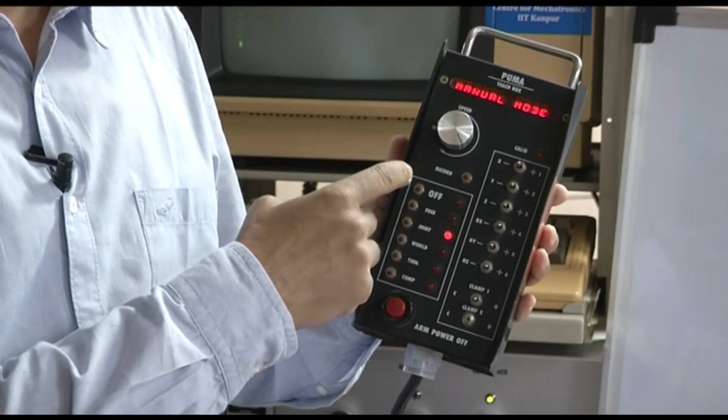The first joint of the robot is what is called the waist. This is the teach pendant by which we can move the robot and also program it. It has joints 1, 2, 3, 4, 5, 6, with toggle keys plus minus, plus minus. If I move any of the toggle keys, the robot is going to move.

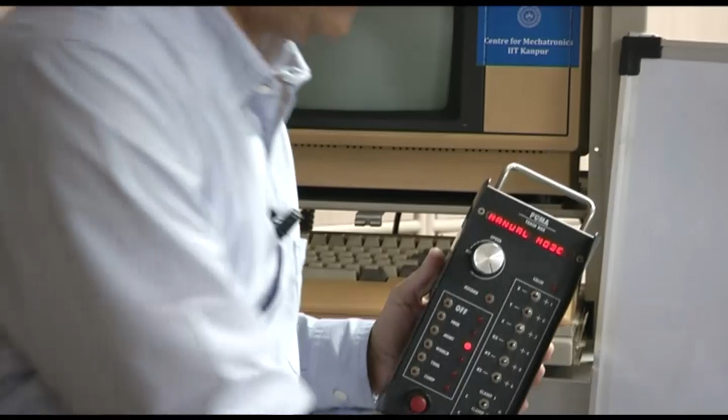The first joint of the robot is the waist axis, which is similar to our waist. When I move my hand, we move across the waist. This is my waist axis, and my hand moves like this. This is my z axis about which I am rotating.

The second axis is this one, which is called the shoulder. When my hand goes up and down is the shoulder axis. The third axis is the elbow axis, which is like this, which is called the elbow. And then at the wrist we have the roll axis, the pitch axis, and the yaw axis.

So we have 6 degrees of freedom, and similar to this we have exactly 6 degrees of freedom on the robot. The first axis is called the waist axis, which is similar to the human waist, and the direction of the axis is vertical, as you can see there.

The second axis, let me turn it this side. So this is my waist. The second axis is the shoulder. In the shoulder axis, the hand can move up and the hand can move down. So this is called the shoulder axis, moving the hand up and down.

The third axis, which is similar to our hand, is called the elbow axis, and this is my elbow axis, which is moving the arm up and down. The fourth axis is called the roll axis, which is rotating the wrist at the wrist. So this is called the roll.

The fifth axis is the pitch axis, which is putting up and down the end effector. So this is my pitch axis, and the sixth axis is the yaw axis, which in this case is looking as a roll about the z axis.

So the last 3 axes - the fourth axis which is the roll axis, the pitch axis, and the yaw axis - they are intersecting at a point, and this is required for having an inverse kinematic solution. So we can program this robot by using the teach pendant shown here, or we can write a program.

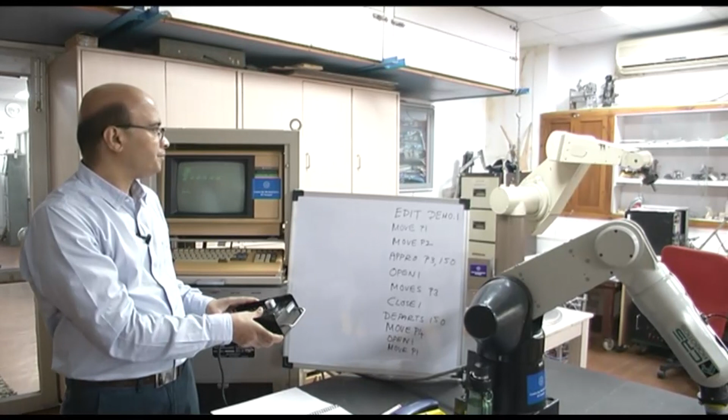So what we will do today is write a very simple program for this robot. Suppose the robot is in one end. Let us move the robot to one side, and say that this is my point P1. So what I am doing is, suppose there is an object on this table.

Suppose I want to pick up this object on the table, and this is the robot - if you can imagine the robot to be same as my hand. So I say that my hand is here and this point is P1. This is equivalent to the point P1 there.

So then if I want to pick this up, from P1 I will come to point P2, which is very near or just on top of the object. Then this is my P3 point. I will go down and catch this object, take it up to P2, take it to P4, some other point, and then drop it and come.

We are going to write a very simple program. The hand starts at a point P1, then comes to point P2, then from P2 it will open the gripper, go down, approach the object and keep a distance of 150 from it. Then it will go down and catch the object, and after catching it, it will depart, coming back up to P2, then go to point P4 and drop the object, then come back to P1.

So the program would essentially mean coming from P1 to P2, opening the gripper, going to P3, coming back to P2, going to P4, opening the gripper, and then going back to P1.

I will draw the sequence here. So we are at a point P1. The robot is at point P1 now, and there is some object here which I want to catch, kept on a table. This is my point P3.

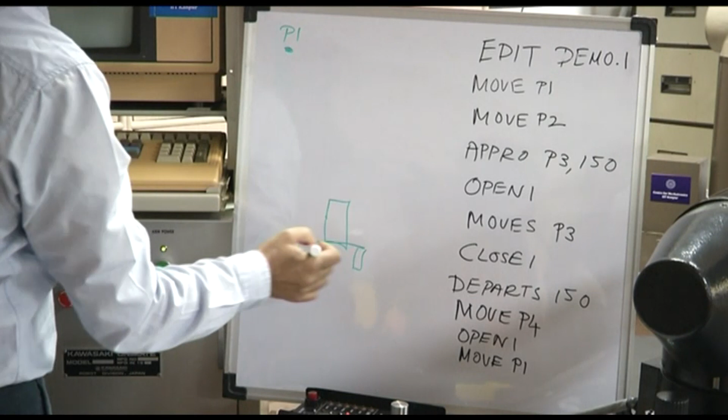So the program we will write would be that from point P1 it will come to point P2. Then it will open the gripper, go down, and wait at a point which is just about 150 on top of P3. Then it will come to P3, close the gripper, and go upward again to P2. Then from P2 it will go to P4, some other point, open the gripper, drop the part, and then go back to P1.

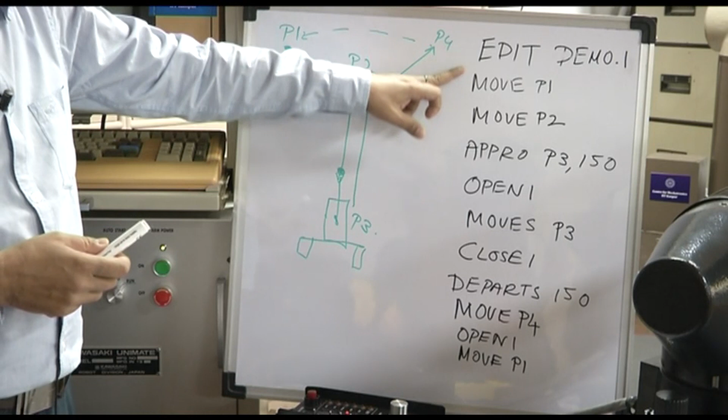So this is the sequence for which I am going to write the program using VAL language. Point P1, it will go to point P2. You can look at the program here which I have written. First is edit demo.1, meaning the name of the program is demo.1. That's the name of the program.

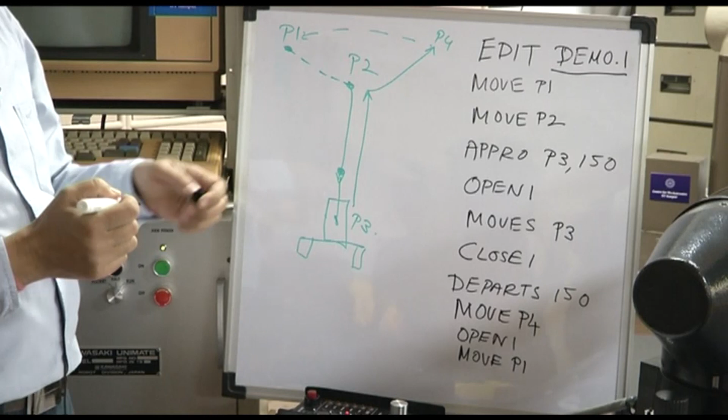Then move P1 - the robot could be somewhere else, so before it starts the operation, it should move to point P1. So the first line is move P1, which is the point we have to define. Next it moves to point P2.

Then it has to approach the point P3. As we saw studying VAL language, we don't directly go to P3, but come somewhere on top of it and wait there using the approach command, which ensures it will stand at a distance of 150 on top of the object.

Then we open the gripper, which is open I. After opening the gripper, it will go down to P3 - note this is 'move' and this one is 'moves', so it will move in a straight line to point P3.

Then it will close the gripper, and depart, meaning it goes straight up by a distance of 150. Then it moves to P4 - this is my point P4, and this is the point where it departs from, and then it goes to P4.

After going to P4 with move P4, it opens the gripper, drops the part, and then comes back to point P1. We can keep repeating the cycle a number of times.

The basic program consists of move commands, meaning move to this point. Then approach - when catching an object, we don't go exactly to it, but come somewhere on top and wait, open the gripper, then go down straight. This ensures the catch motion is straight and the depart motion is straight, using the approach command and the depart command. So the basic commands are move, approach, open, close, depart - that's it.

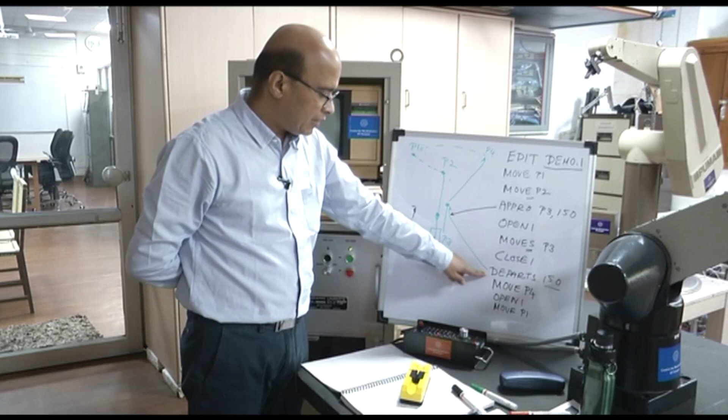Using this, we can write the program to perform this cycle, where the robot goes from one point to another, catches the object, picks it up, goes elsewhere, drops it, then goes to the third point. I'll write the program very quickly, typing it in on the monitor and keyboard using basic-like structure and commands. I'll type this in the command line and then execute it. So exactly this program I'm going to type in - edit.

So edit demo.1 is the name of the program. The first command is move P1. Okay, let's use some other name. Demo.1 is already there, so let's call it demo.5. I'll just change the number. So demo.5 - that's a new program. Okay, so it says program demo.5. That's the name of the program.

So the first line I will type exactly this command in that sequence. It is move P1, that is move to the point P1. Then we say move P2. Then we say approach the point P3 and keep a distance of 150. Then we say open, open I, which means open immediate, then moves P3, that is the point where the object is kept, and then we come to close I, and then it is depart 150. So after catching the object, it will depart, go back straight 150, which is here.

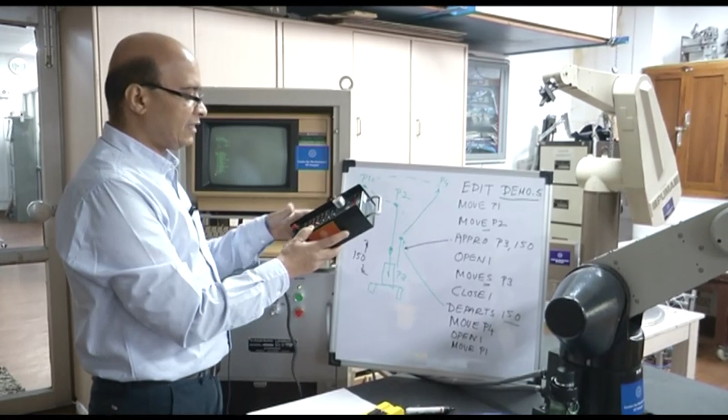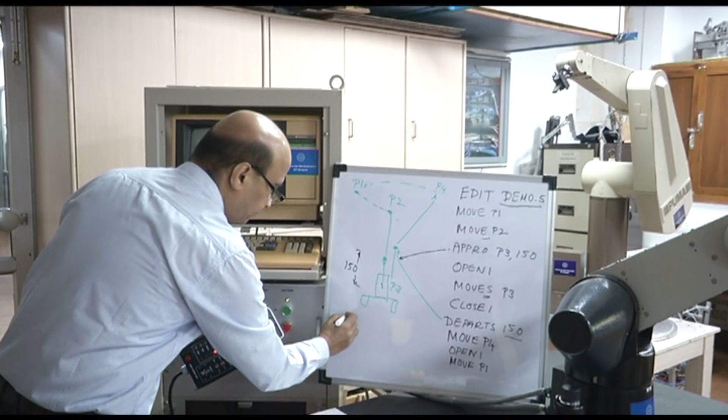So for teaching the points, I can use the teach pendant. Using the teach pendant, I toggle the joints and I say that is my point P1. Suppose that is the point P1, that is this point in space now. So now what we will see is, we will say here is the point P1. The command that we use here is called here P1. So with this it understands that this point is actually P1.

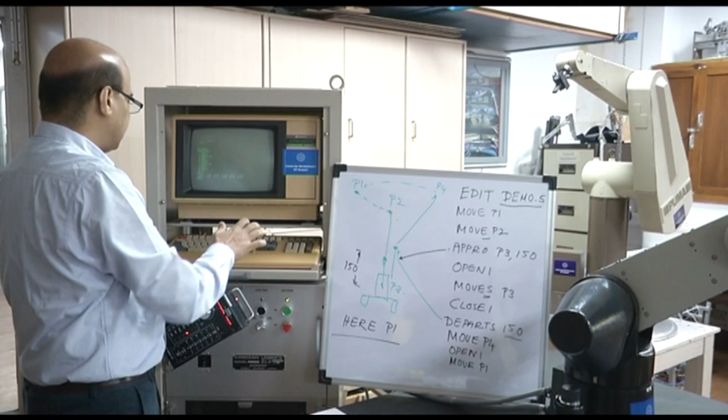So now when I say right here P1, it will actually show me the coordinates of the point P1 in space. You can see that it has 6 parameters, the x, y, z, and theta 1, theta 2, theta 3 at the end effector. So the x coordinate is 663, the y is -78, z is 427. This is in millimeters. So the base coordinate of the robot is 0, 0, 0, which is at the base, at the waist of the robot, and this is the x, y, z, and theta 1, theta 2, theta 3 are at the wrist.

So now if it is saying do you want to change this, so I say yes. Now it has assigned this coordinate to the point P1. So we have taught it the point P1. Next I want to teach it the point P2.

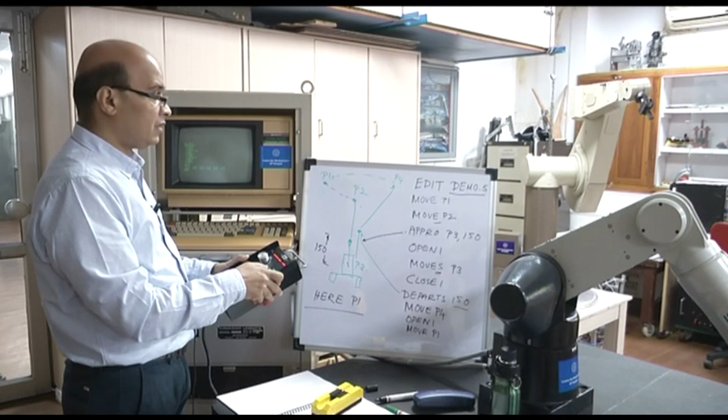So what I do is I move this here, let's say. So I move it here, and this comes down a little bit more. So this is my point P2. So I will teach it again and say this is here P2. Again it is giving me the coordinates of that point. If I am happy with the coordinates of the point, I will enter, and it understands that this is the point P2 that I want. So I enter here. Now I have taught it the point P2. That is the point P2.

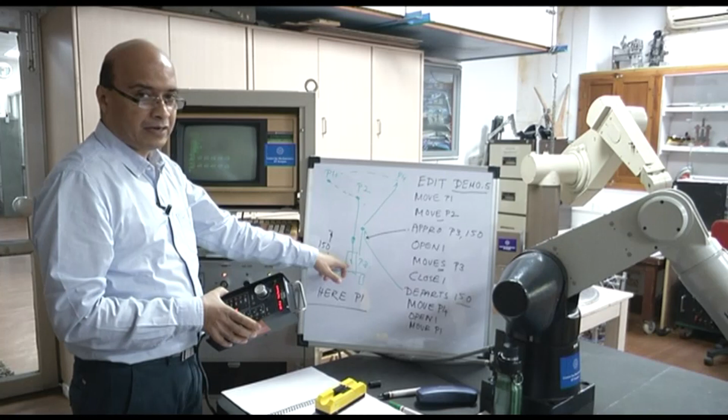Now I want to teach it the point P3, which is let's say a little bit down. So I bring it down here and say that is the point P3. So this is the point P3 where I want to pick up something from. So I will teach it the point P3 as that point.

Okay, so that was my P3 point. So I will say here P3, and that is the point. It is also giving me the coordinates of the point P3. Now I have taught it the points P1, P2, P3.

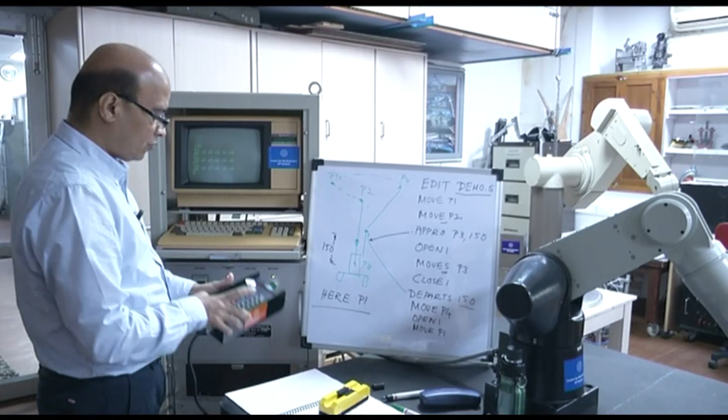I have to teach it the point P4 now. So that is maybe that side. I move the robot that side where I want to go and drop it, so maybe it has to go and drop it at some other point that side. Okay, so that is my point P4.

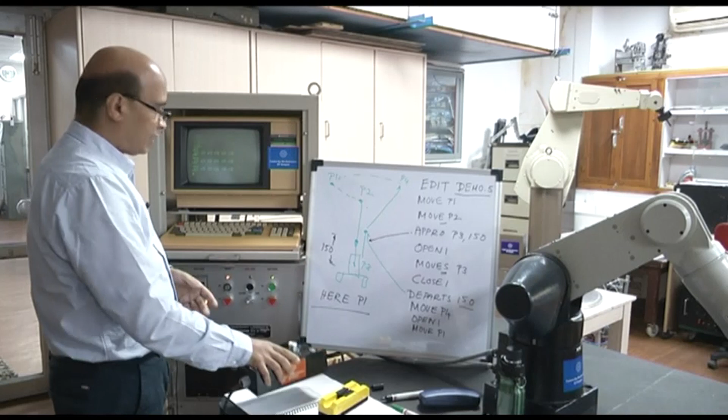So again I will teach it the point P4 and say here is P4. So it understands that this is the point P4. So I have taught it P1, P2, P3, and P4. Now I have taught the various points and I am going to execute the program now. Before executing the program, we have to set the speed.

So the speed command is speed. So we have to say speed, and if you are operating at say slow speed, it is at 20%. This is a percentage, so full speed is 100%, lower speed is 10% or 20%. So let's say we are putting speed as 20.

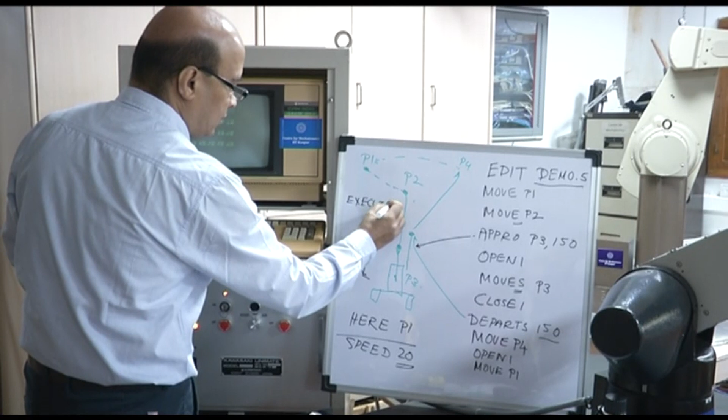Okay, so after putting the speed as 20, I will execute the program. Executing the program has the command of execute. So, execute demo.5. This command essentially the robot understands that I want to execute this program, and the program name is demo.5. Okay, so I am going to execute the program.

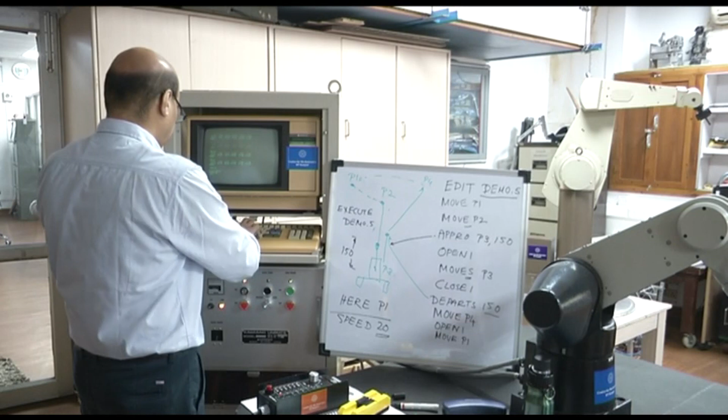Now, when we are executing the program, you can see that we are starting with point P1. So this was the point P1 that I taught it. It is coming to the point P1, then it is going to the point P2. You can see exactly this sequence it is following. Then it is going down, approach, and stopping.

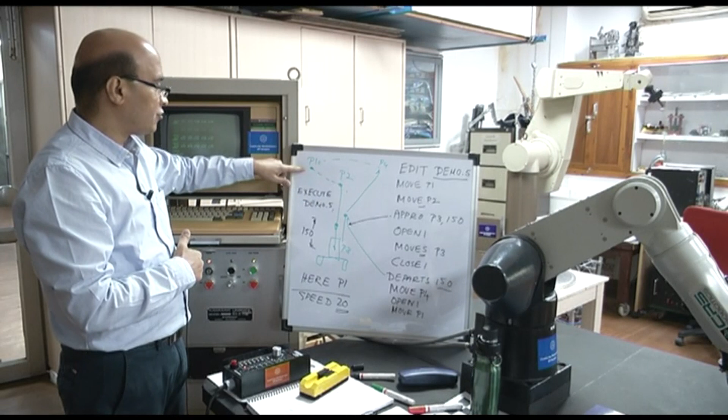So the exact sequence of operations that it was doing is it was going from P1. We will see that again. So this is the exact sequence of operations it was following. That was my point P1. Then it went to point P2, that was somewhere there.

Now, before it went to point P3, we are using approach. So it is approaching the point P3 and waiting at a distance of 150. Then it is going down straight, because there is a straight line command which is move S P3. So it is coming down, and then it is going backward again, which is after close I, it is departing 150, and then it is going to P4 and then coming back to P1.

So this is the cycle in which we are operating. This is an example of how to write a very simple program.

Now, the gripper is pneumatic. At the moment, the pneumatic is not working, so it is not opening and closing, but the open command is open I and close is close I. If you are trying to catch an object, we have to open the gripper before we catch the object, and after positioning at the gripper, we have to close it. So this is for one cycle.

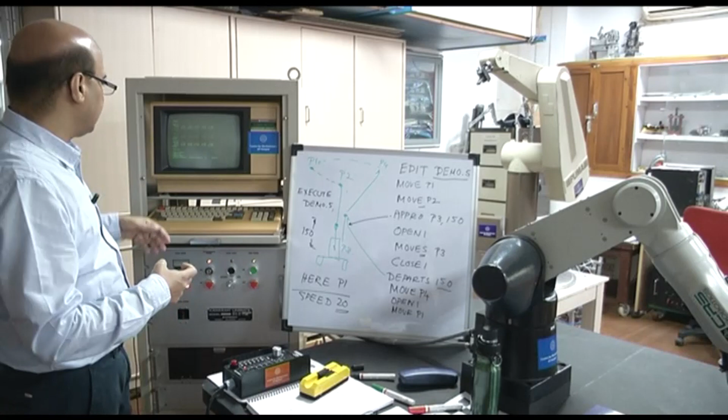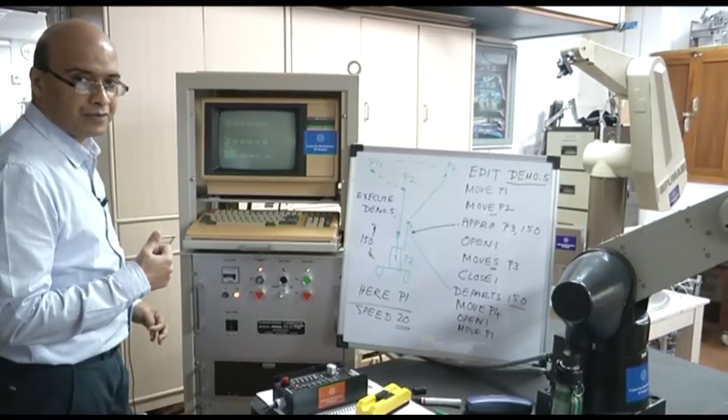If I increase the speed to 100%, using the speed command, I have increased the speed to 100%. So I am going to make it 100% speed now. I will simply say 100. So it is operating at full speed now, so let us say speed.

This is operating at a higher speed, but it is following the same sequence of operations that you can see.

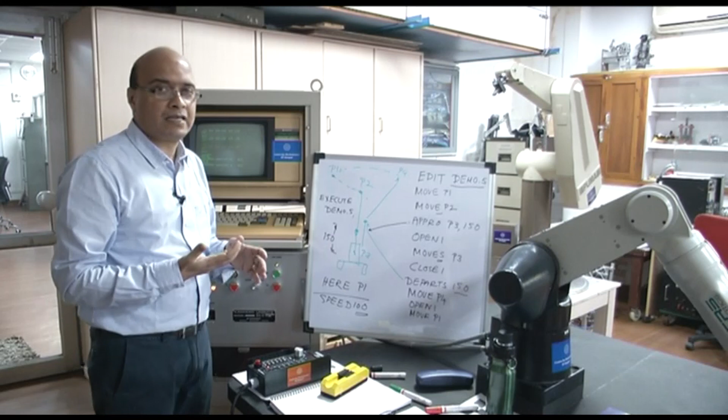Now, a robot is not used for only one cycle or two cycles. A robot would be used for performing a very large number of cycles, maybe millions of cycles. So for that, we can say execute demo.5, and write how many number of times it should execute. For example, if I want it to execute 10 times, I will simply write the number of cycles. So the command is execute demo, this is the program name, comma, and this is the number of cycles.

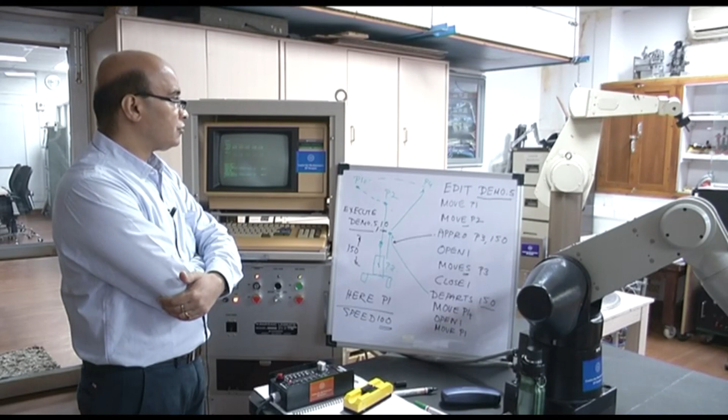So let us write it here as execute demo.5 10 times. The command is execute demo.5 is the program name, and 10 is the number of cycles. So this is operating the same cycle, but it will be doing the cycle 10 times. In industrial applications, normally the robot will not be operating only once, but it will be operating for a very large number of cycles.

It has a counter, and it shows the program has completed, executing 10 times. There's a counter which keeps counting each cycle, and once it reaches 10 cycles, it will stop. But the sequence of operations was exactly the same.

So we can write very simple programs using VAL II language like this, using simple commands like move, approach, open, close, and execute pick and place applications, spot welding, spray painting, and different applications.

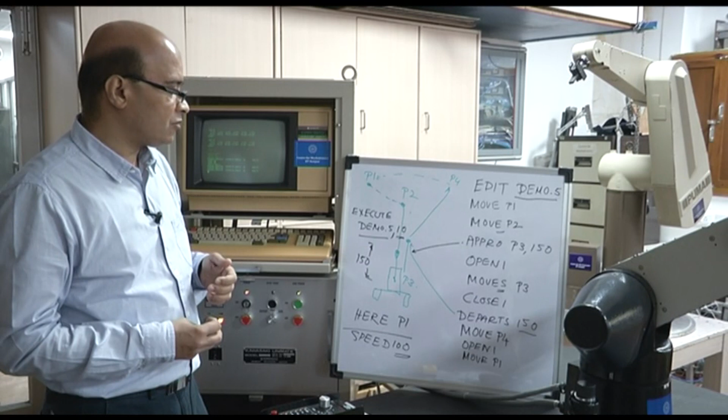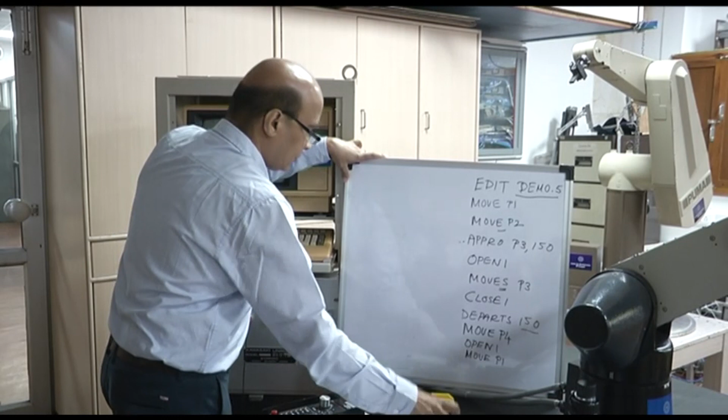Now, in the earlier lectures on Val2 programming, we had talked about two commands. The first was the difference between move and moves. So there is a command move, and there is another command moves. This one basically takes the robot from one point.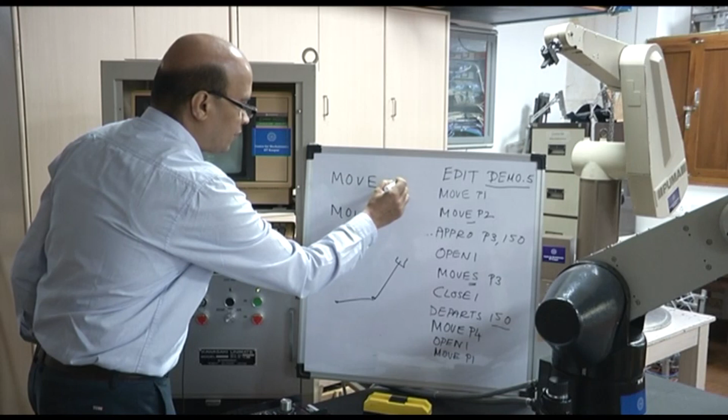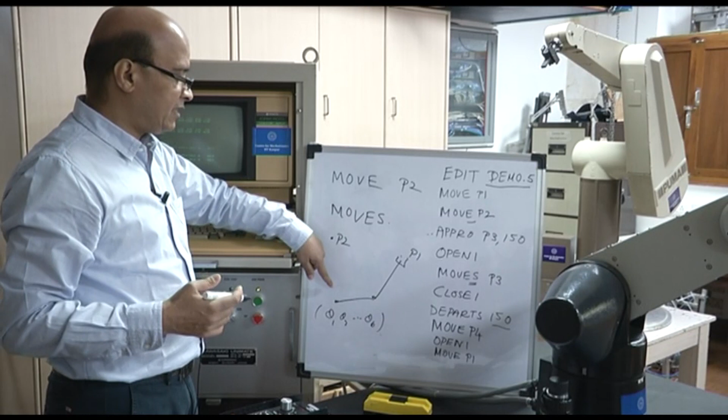So if I have a robot like this, let's say move P1 or move P2. This is my point P2, this is my point P1. If I say move P2, since there are different degrees of freedom here, theta 1, theta 2 up to theta 6, what it will do to go from here to here is find the minimum energy trajectory. Now the minimum energy trajectory will not be a straight line. So when it is moving from here to here, it will not take a straight line, but some other curved path in space.

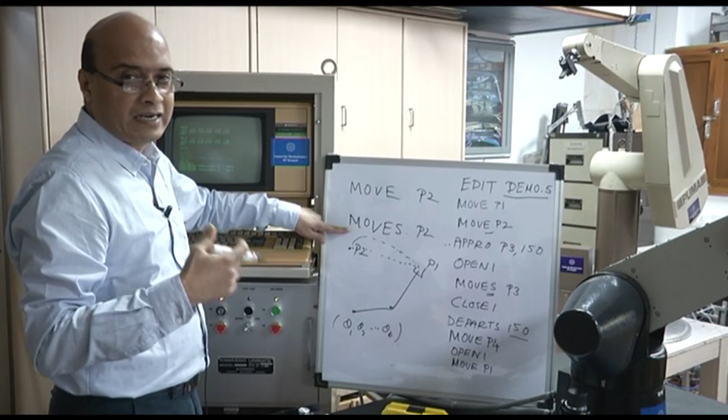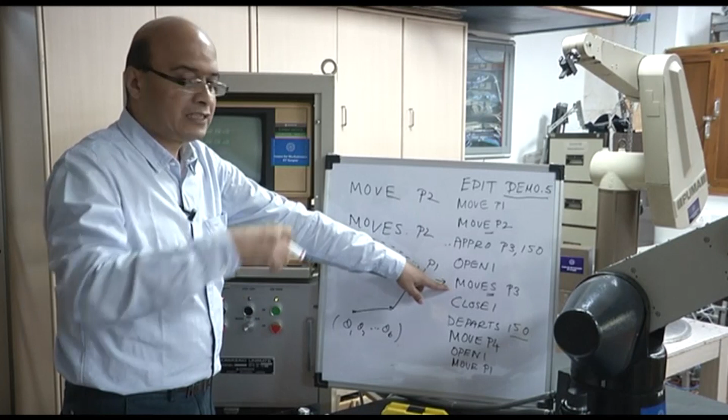Whereas if I use the moves command, suppose I say moves P2, then it basically means it has to follow a straight line and come from P1 to P2. Now, following a straight line takes more energy, so unless required, this command is not used. If it is just moving, we say move, but when we want it to follow a straight line, such as when picking up or dropping an object, we use the command moves.

So let us look at these two examples. That is my point P1. Let me take it somewhere else. So this is my point P1. I have already taught it P1. Let me write a program which will take it from here.

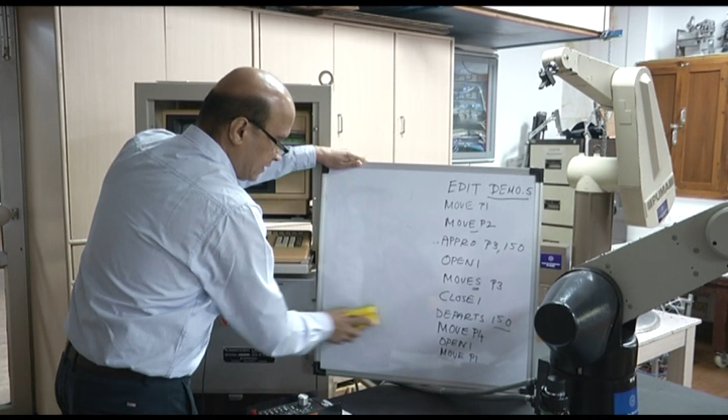This program is essentially to show the difference between the two commands move and moves. So we have move P1, let's call it edit demo.6, that is the name of the program. Move P1, and then we say move P2.

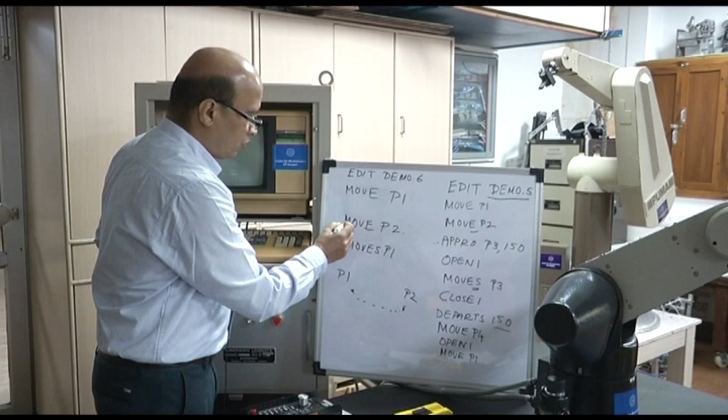Suppose I am here, this is my point P1, this is my point P2 in space somewhere. I am saying move, so it will take some other trajectory. Then I say move P2, so from here to here it is going by following the command move, not a straight line but some other minimum energy trajectory. Then I say moves P1, so it comes from here to here, and in this case it follows a straight line. So we want to see the difference between this and this.

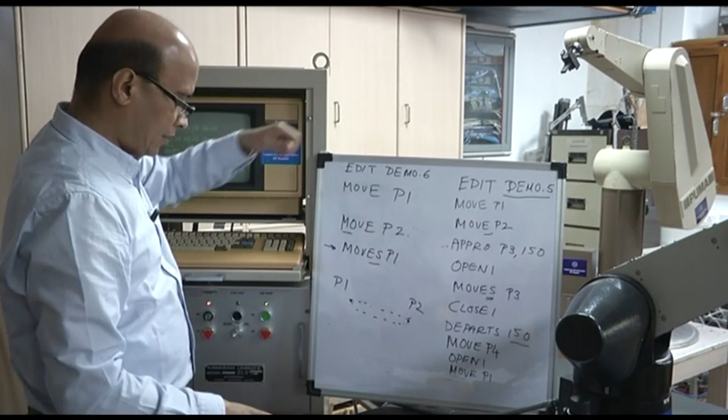So let us write this program and see how it behaves in space. This is to understand, so this is the point P1. Let me teach it another point, some other point P2.

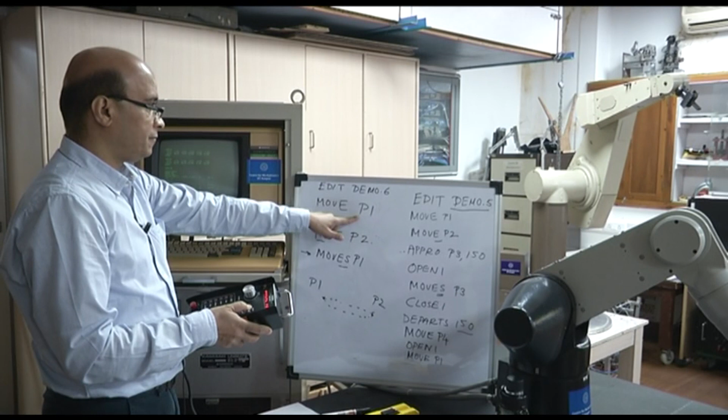P1 is already known, that is my point. Let's say that is my point, so that is my point P2. So what I do is let me write this program.

Here I am going to write a program again. So, edit demo.6, this is another program called demo.6. Essentially this program says move to the point P1, move P1, then move to the point P2. So it has moved to the point P2. I am at P1, saying move to point P2, and after it has gone to point P2 taking a curved path, I am saying move in a straight line back to point P1.

So now I am saying moves P1. This is a very simple program to move between 2 points. Once it moves in a curve, and then it moves back in a straight line. Let's teach that point as P2. So that is my P2, that is my point P2. I teach the point P1 which is already learnt, and P2 is the point which I am teaching it now. So let us cut down the speed to 20%, then execute.

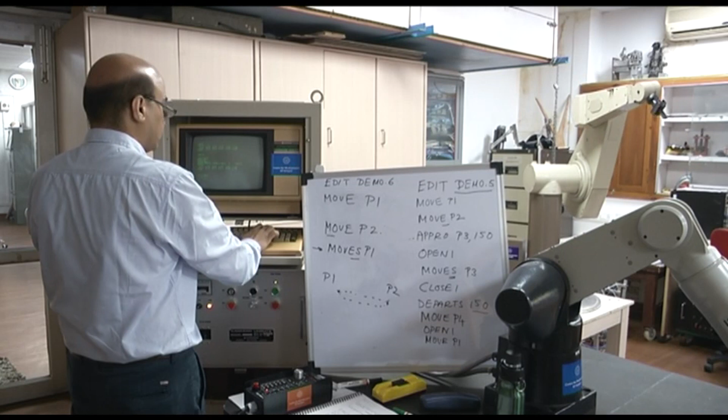And teach this as point P2.

Okay, let's try to move it down a little bit. This is my point P2. Let's move it to some other point. It is not being able to find the trajectory coming back this way, so it is going to come back using a straight line only. This is basically showing how the robot can move from one point to another.

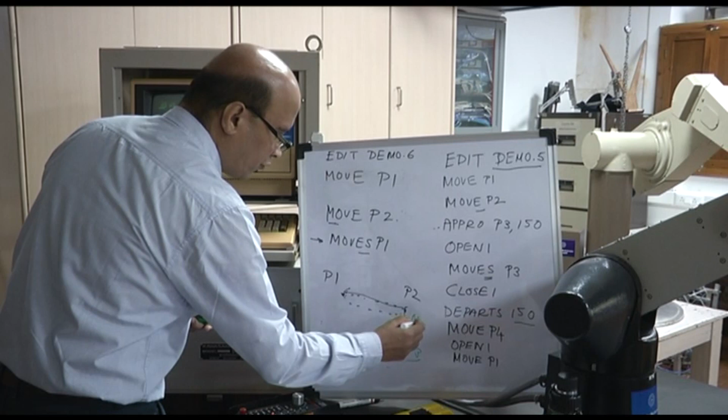And say this is my point P3. So let's teach this as point 3. So P1 is here, P2 is here, and I define another point P3 here. What I will do is move to P3 using the moves command, and then it will go back using the move command. These are two different commands to go from P1 to P3. Let's have a look at that.

So what we have done here is write a program to take it from P1 to P2, then move, and it moves in a straight line. Let me write the program again. It starts from move P1, then moves to P2, then moves to P3, another point, and then moves back to P1.

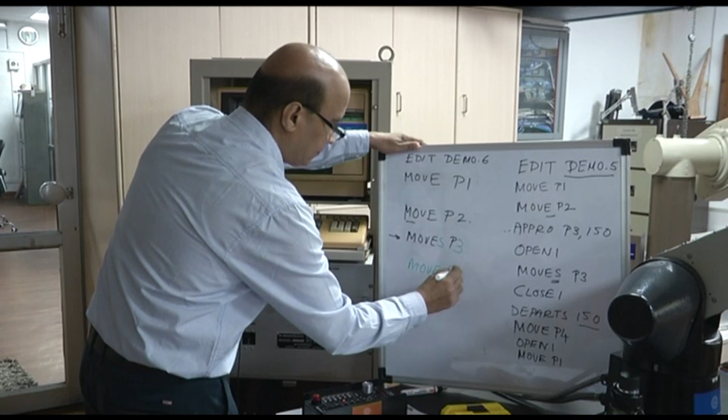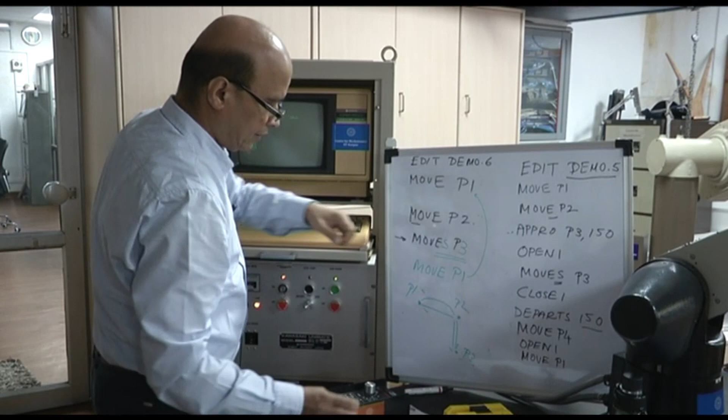So we have 3 points. This is P1, this is P2, this is P3. It goes from here to here, then there. From here to here we are using the straight line command, so it should move in a straight line. I want to show the difference: from here to here it goes in a curve, then here it goes in a straight line, and coming back it again goes in a curve. Basically showing the difference between the commands move and moves.

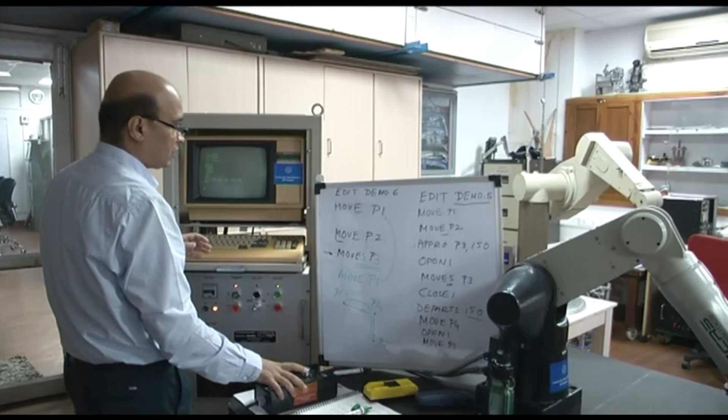So P1, P2, P3 are taught points. If that's my point P3 here, so I've taught the 3 points P1, P2, and P3. P1 was already taught, somewhere on top. This is my point P2, and my point P3 is somewhere here. Sorry, this is my point P1.

So from P1 it goes to point P2, then to point P3. You can see it moving very slowly because it's going in a straight line, and then from P3 it goes back in a curve. This shows that when using the command moves, the robot moves in a straight line and becomes very, very slow.

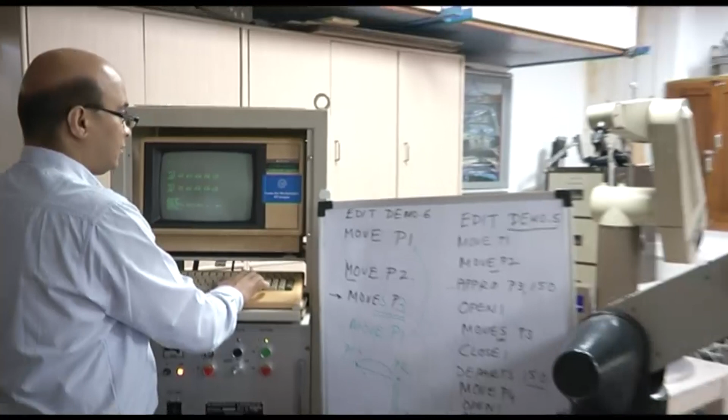The speed becomes very slow here because it has to compute the straight line path and then move at that speed. So if I increase the speed to 100% and cycle it, let's say 5 times, I've increased the speed and am executing the cycle 5 times. Basically to observe that going from here to here it goes at high speed, but using the moves command to point P3, it goes very, very slowly because it has to go in a straight line. Then from P3 to P1 again, it goes very fast.

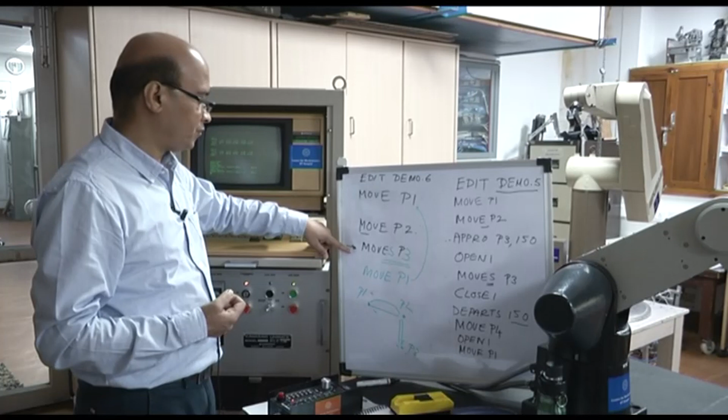So this is essentially to show that the curve motion is very fast, but the straight line motion is very slow. That is because it has to do more computation, the inverse kinematics is more difficult. So the moves command is only used when you have to pick up an object and go in a straight line, not otherwise.

So, this is essentially to show how a very simple VAL2 program can be done using robot program, done using VAL2 language.

After this we will be looking at microcontrollers, the Arduino. Using these microcontrollers we can make very simple robots. This industrial robot arm cannot be made in a lab, but it has very sophisticated controllers and actuators, and is also very expensive. But we can make very simple robots using simple microcontrollers, servo motors, which are very cheap, by using the Atmega microcontrollers.

After this we will look at another 2 programs where we can make very simple robots just to understand forward kinematics and inverse kinematics of a 2-link system and also a 3-link system. So 3 degrees of freedom or 2 degrees of freedom can be made very simply.

So let us move on and look at the next 2 robots which we can make in the labs ourselves. After looking at the Puma programming, which is an industrial robot, we will look at very simple arms, how to make very simple arms using 2-link or 3-link systems and using microcontrollers, which you can make in the labs itself.

So first we will start off with a 2-link arm, and I will explain the forward kinematics and the inverse kinematics of a 2-link arm, 2 degrees of freedom, and then we will look at the forward kinematics, inverse kinematics of a 3-link system, 3 degrees of freedom, and then we will look at the actual robot, how to control it using a very simple microcontroller.

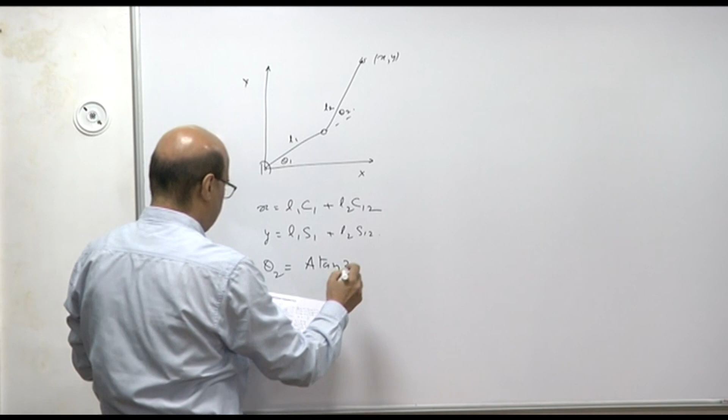So when we solve it, we can write the solution straight, since this has been solved earlier. So theta 2 is equal to atan2 of sin 2 and cos 2, this is to find the angle theta 2. And angle theta 1 can be written as tan inverse of y, L1 plus L2 cos 2, minus x, of L2 sin 2, divided by x times L1 plus L2 cos 2, plus y times L2 sin 2.

So this 2-link system has 2 degrees of freedom, theta 1 and theta 2, and we can find the inverse kinematic solution for theta 1 and theta 2 like this.

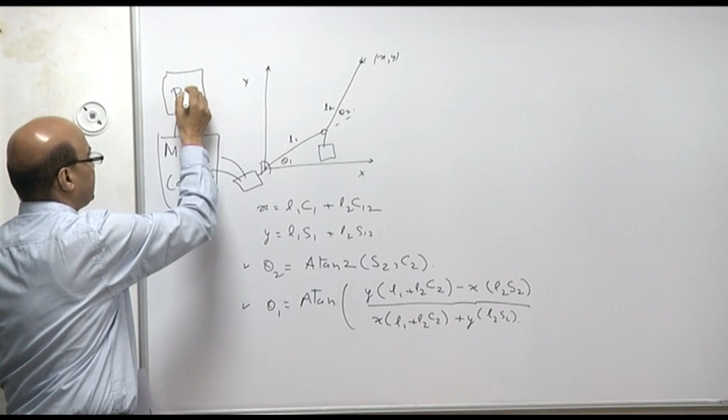Now what we are going to do is connect a servo motor, a small servo motor, onto each of the joints, and each of these joints will be connected to a servo motor, and this motor will be controlled by a microcontroller. So we are going to have a microcontroller here, which is indirectly going to be connected to the PC. This is a very simple experiment which you can do very easily in the labs and very cheaply.

So we can make a 2-link system, connect servo motors which are very cheap, we can buy them for 400, 500 rupees, connect with the microcontroller and then connect it to a PC, where we can write the code for the inverse kinematics solution, theta 1 and theta 2. This is for the forward kinematics: if I give my input theta 1 and theta 2 here, I am going to get the output x, y. In the inverse kinematic solution, if I give my x, y, I am going to get the output of theta 1 and theta 2.

So, this is a very simple experiment which can be done in the labs. You can make it. We will see how to do that now, how to write the program.

The second experiment we will look at is for a 3 link system. For a 3 link system, we have these 3 links. Look at this carefully.

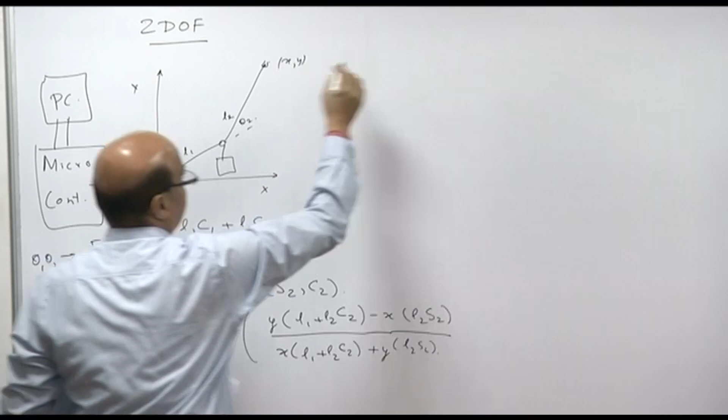So, x, this is a 2 degree of freedom, this was 2 DOF, this one is 3 DOF, 3 degrees of freedom. So, in the 3 degrees of freedom system, this is my coordinate system that I am using: this is my x axis, this is my y axis, and this is my z axis.

Now, if you can imagine, if I draw it in terms of DH parameters, then this is one link, this is one joint here, and this is another joint. So, this is one joint, this is one axis, this is another axis, and this is another axis. So, this is my 3 degree of freedom system.

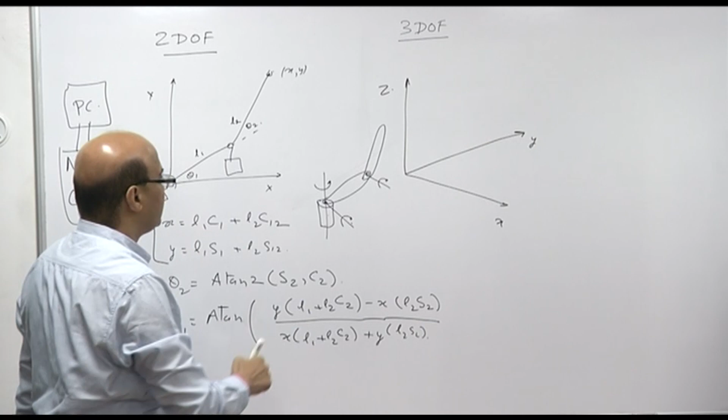This is a 2 degree of freedom system which has 2 links on a plane. Now, if you rotate this plane about this axis, then it becomes a 3 degree of freedom system. So, this is essentially extending one more degree of freedom by putting a rotation about this joint, which is translating it into this kind of a system which is 3 degree of freedom.

But here we need to understand something, that these 2 behave like a 2 link system. So, it is planar, rotating about this axis. Based on that we will try and solve it using geometry, which is very simple to understand.

So, this is one link, this is 1 degree of freedom which is rotating about this axis, then there is another link here and there is another link here. So, this is my L1, this is my L2.

So, the coordinate of this point here is x, y and z. It is 3 degrees of freedom. So, it has 3 coordinates.

But now, if you look at the projection of this fellow, if you are projecting it down, what is the meaning of x, y and z? If you are projecting it down, it will come as a projection here, because this and this is a planar system. So, it is a plane actually. So, if I project it, it comes here.

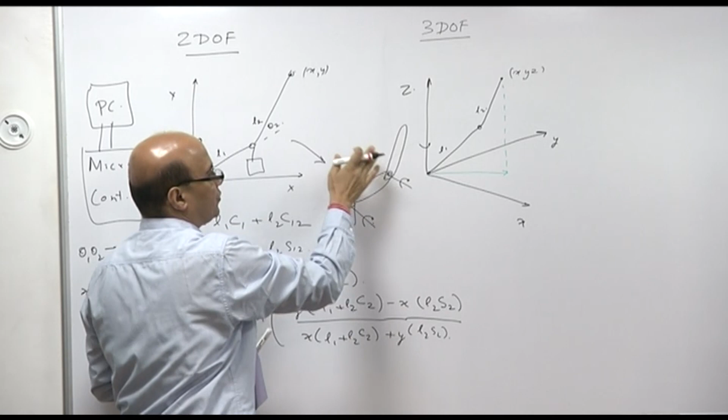So, this is a projection on the x axis, and that is a projection on the y axis. That is the meaning of x, that is the meaning of y, and the top is the meaning of z. That is the meaning of the 3 coordinates x, y and z.

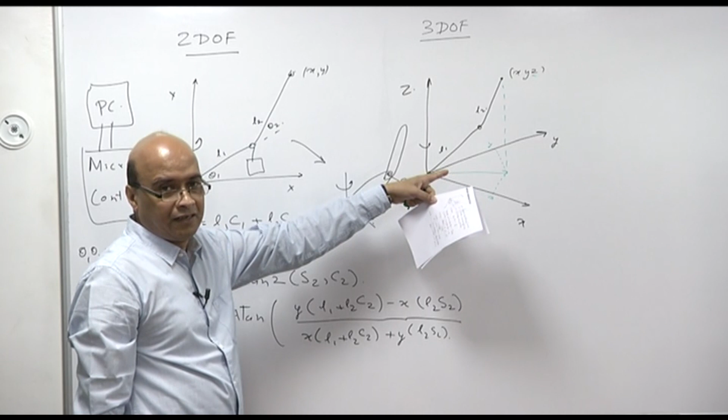So, we are going to use this solution and try and get this solution very simply. You can also use DH parameters and do inverse kinematics, but this is just a geometrical solution.

Now, if you look at the angles, this is my angle theta 1, this is my angle theta 2, and this is my angle theta 3. So, theta 1, theta 2, theta 3 are defined like this.

So, the solution of these 2 are on this plane, which is same as this solution, and this solution is getting projected onto this. So, cosine of this length is going to become my x coordinate, and the sine is going to become my y coordinate. That is the meaning of the 2 coordinates.

So, we will look at the inverse kinematics of the 3 degree of freedom system now. It is an extension of the 2 degree of freedom system. 2 degree of freedom has these 2 links, and these 2 links are moving on a plane.

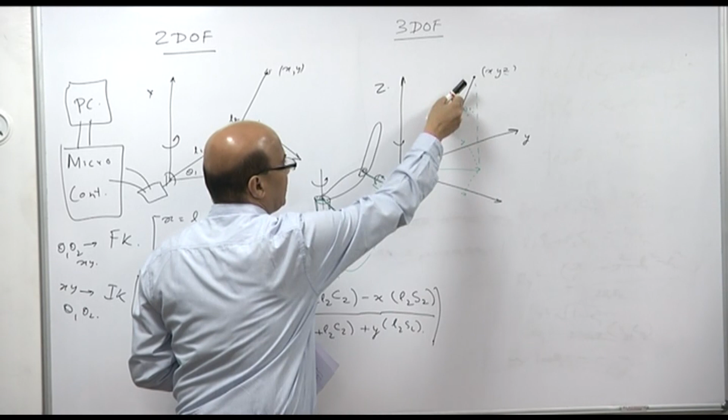So, this is my plane, and this plane is being rotated. So, essentially there are 3 angles theta 1, theta 2 and theta 3. And we are going to reduce this problem to try and solve it in terms of using geometry.

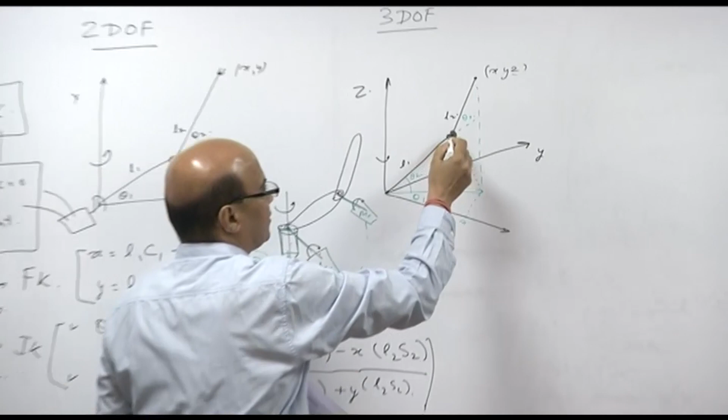So, we have our two equations, and the projection of this line is cos theta component here and sin theta component there. So, this line here is essentially L1 cos theta 2 plus L2 cos theta 2 plus theta 3.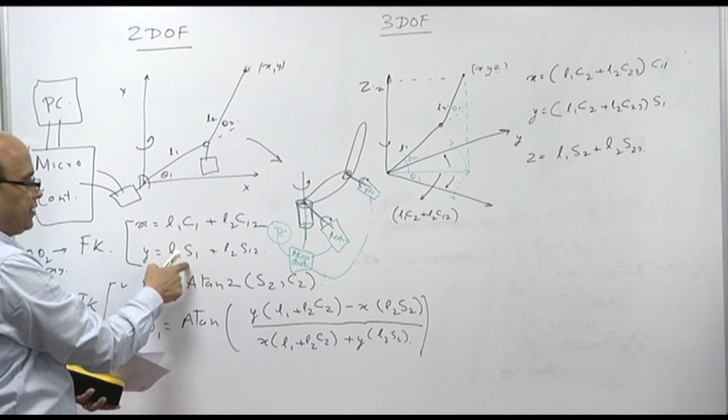Now, I can try and use this solution itself, reduce it into these equations, then square and add to get this. So what we will do here is reduce - I will simply bring the cos here and the sine here, and then square and add.

So what we get is: x by cos1 is equal to L1 cos2 plus L2 cos(2,3), and if I bring the sine here it becomes y by sine1 is equal to L1 cos2 plus L2 cos(2,3). So I get one equation here and I get the other equation which is this one, and then I square and add.

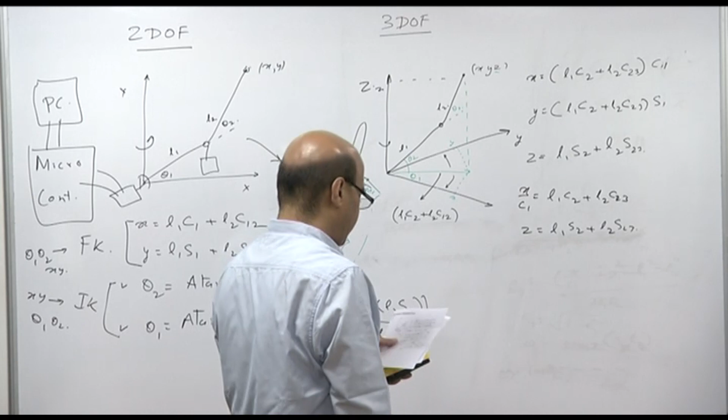So, L1 sine2 - this is my z coordinate - L1 sine2 plus L2 sine(2,3). This is what we get. Then we can square and add, and what we get is cos3. Cos3 is equal to (x by cos1)^2 plus z squared, minus L1 squared minus L2 squared, divided by twice L1 L2.

And from cos3, I can find sin3 in terms of 1 minus cos3 squared, and then I can find theta3 as Atan2 of sin3, cos3.

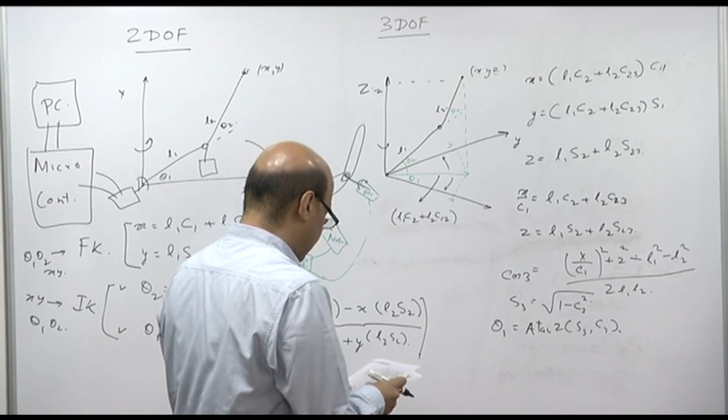And from here we can compute tan theta2 simply using geometry: z into (L1 plus L2 cos3) minus (x by cos1) times L2 sin3, divided by (x by cos1)(L1 plus L2 cos3) plus z times L2 sin3. So exactly a similar structure of the answers comes.

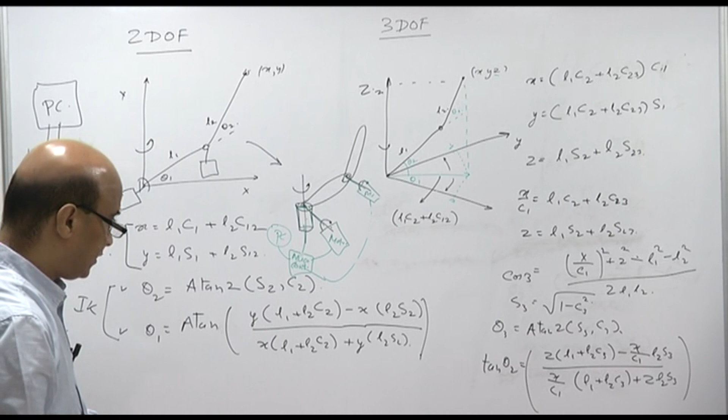Using this we can do the forward kinematics and the inverse kinematics. Forward kinematics means putting our input as theta1, theta2, theta3, and getting x, y, z. Inverse kinematics means giving x, y, z, and getting theta1, theta2 and theta3.

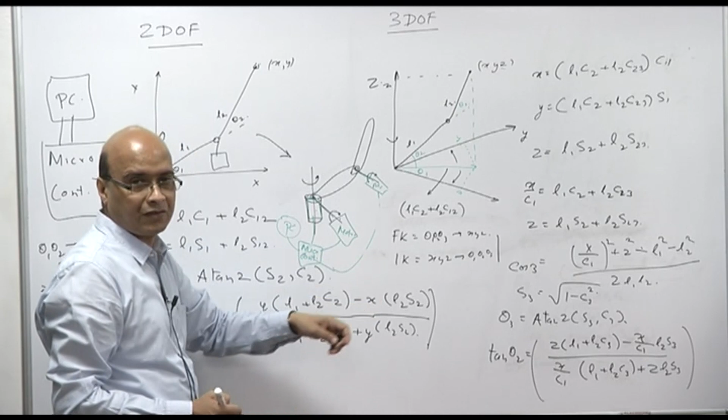So what we are going to do next is put motors onto each of the joints, connect the motors to the microcontroller. The microcontroller will be connected to the PC, which will have these equations in the forward direction and the inverse direction, so we can do the forward kinematics and inverse kinematics solutions. Let us look at the lab setup to see how we can embed this into a microcontroller program and then run the system itself.

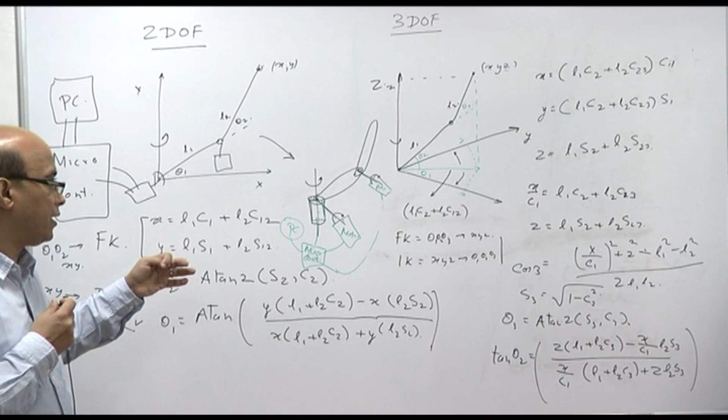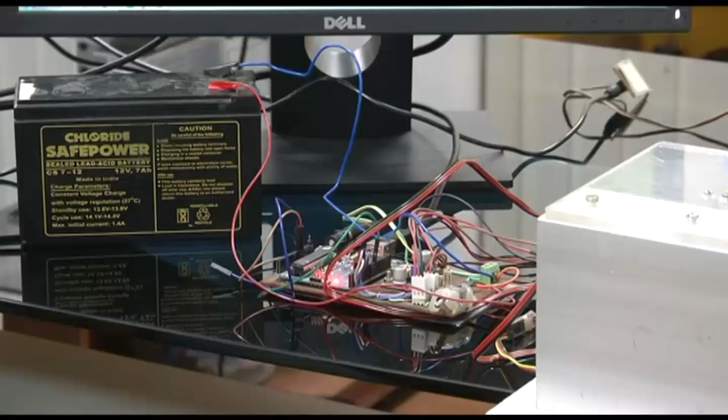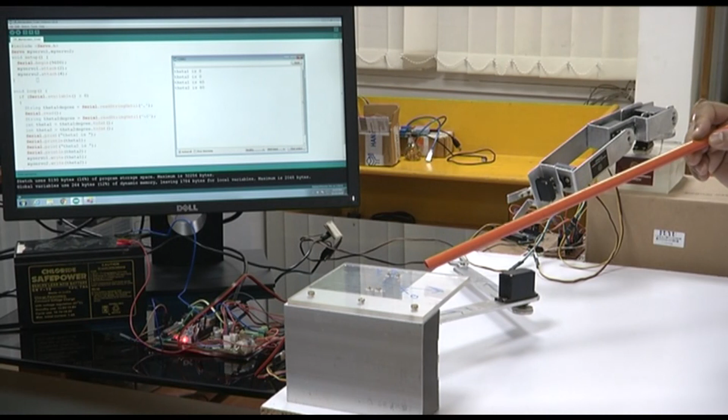Now if I change the angle, it will go back again. Maybe you can change it to 30, 30. So what we are doing is just giving the angle input, and that myservo program, which is a library function, is essentially driving the motor to bring it to 30 and 30.

So now this angle, you can see, this is my x axis, and this angle is 30 degrees. This angle with respect to this is 30 degrees here. So with reference to this, the angle is 30, and if this is my reference, with respect to this it is 30. So this is essentially to show how the microcontroller program works for driving the motors to a particular angle.

Now we want to also look at the forward kinematics and the inverse kinematics. For that we have written a GUI. In the GUI, the equations that I just explained in terms of theta 1 and theta 2, in terms of the xy coordinate, and the solution for theta 1, theta 2, are written in that, and using that we have made a GUI, and in the GUI these programs are written. There is a forward kinematics and an inverse kinematics in both of them.

So in the forward kinematics equation, again you can have a look at the GUI here. This is setting it to 0,0 position. This is the GUI. Inside the GUI is a program, and in the program we have written our inverse kinematics and first the forward kinematics and then the inverse kinematics. So this is showing the forward kinematics and this is showing the inverse kinematics solutions. And as input here we are giving the joint angles in the forward kinematics.

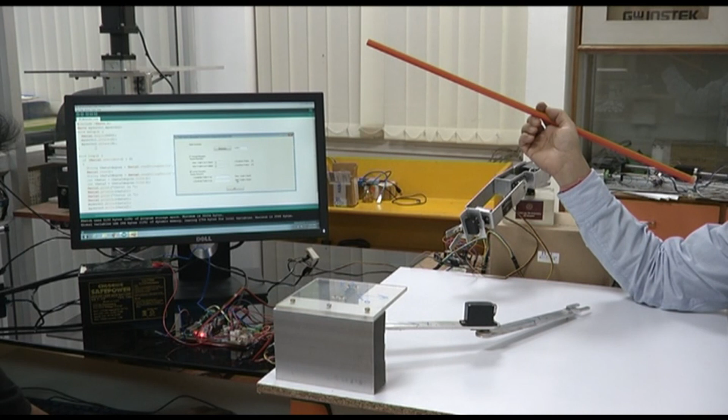Now in the second case, this is for forward kinematics, and the second one is for inverse kinematics. So in inverse kinematics, if you give it some xy coordinate here, it will compute the angles theta 1 and theta 2 and then go there. Let us give some point, maybe 1 and 1.5. So we have given coordinates there, x and y, and it is computing the angles and then going to the point.

So if you change the required coordinates, it will compute backwards and take theta 1 and theta 2. So this is how forward kinematics and inverse kinematics works, and we can write a very simple program to design this kind of simple manipulator to understand how it works.

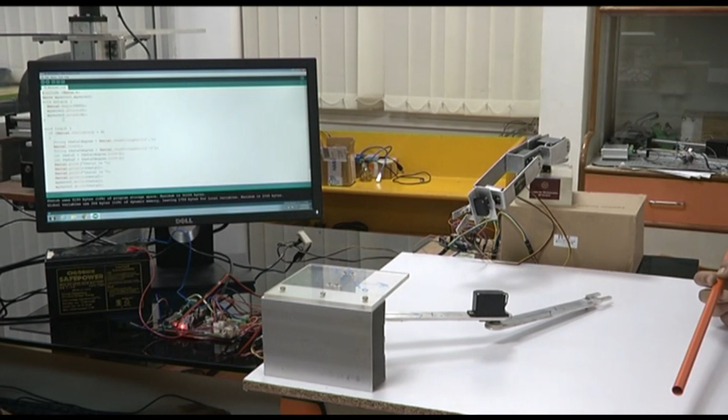Now let's look at the 3 degree of freedom arm. It has 3 axes. The first axis is this one. This is the 2 degree of freedom arm, 1 and 2, moving on this plane. This link and this link are moving on this plane, and this plane is moving across this axis. So that is how it becomes 3 degrees of freedom.

The Puma robot also has 3 degrees of freedom up to here, and then 4, 5 and 6 are at the wrist. All industrial manipulators have this basic structure: one base that rotates like a waist, this is called the shoulder, this is my elbow, and roll pitch yaw are here. If I do inverse kinematics for x, y, z up to here, it is possible to control the robot anywhere. So this is the 3 degree of freedom arm.

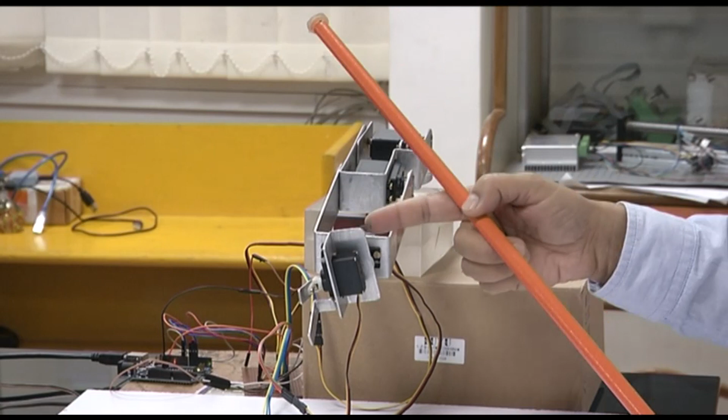This has 3 degrees of freedom, and as you can see in the GUI, this has forward kinematics and inverse kinematics. There are 3 degrees of freedom, so theta 1, theta 2 and theta 3. Whatever angle we give, the microcontroller will drive it to that particular angle and it will position itself. Let's say this is my 0, 0, 0 position, for the base frame, the first axis and the second axis. The fourth axis we are not moving here, we are just considering x, y, z, the coordinate point of the end effector.

So we can give 30 degrees, 30 degrees, 30 degrees. What we can see is that it has moved 30 degrees here, 30 degrees of this one, and 30 degrees of this one.

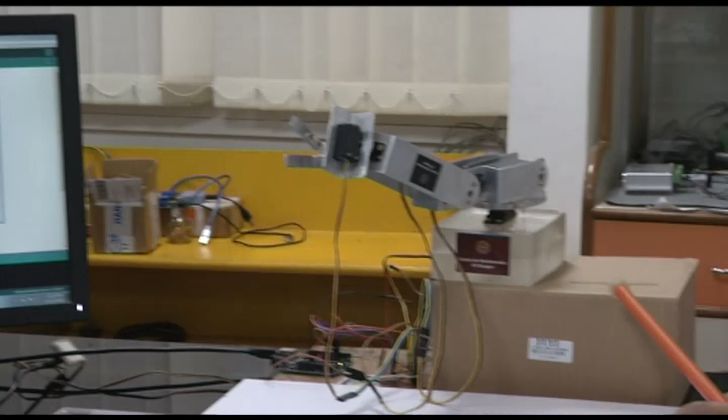This is a little bit, so we can increase it to maybe 60, 60, 60. Now you can see it has moved, it was here, it has moved that side. This was my 0 axis, it has moved this side, that is 60 degrees of the first axis. The second axis, this was my 0, it has gone up like this, that is 60. The third axis, this is my 0, it has gone like this, which is 60 degrees. So there is 60, 60 and 60, and it has come to some point in space.

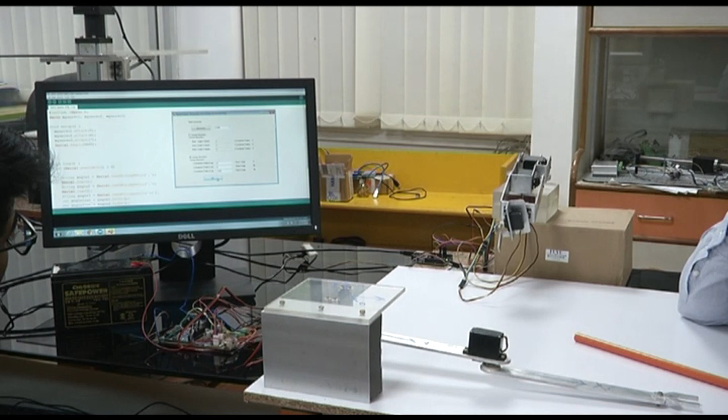So this is the forward kinematics, where I am giving the input as the angles theta 1, theta 2 and theta 3. Now in the inverse kinematics, we can give the coordinates, and it will compute the inverse kinematic solution. So this is my 0, 0, 0 position. It will compute the corresponding angle and go there. So we can input some numbers, and then you can find that it is finding the inverse kinematic solution and going to the end effector position there.

This is essentially to show that very simple robots can be made, 2-link systems, 3-link systems, and they can be controlled very easily. Most of the programs are available online and open source. We can understand forward kinematics and inverse kinematics for 2-link systems and extend to 3-link systems. The extension of this 3-link system has the same structure as the Puma robot, which additionally has 3 degrees of freedom at the wrist, whereas the basic degrees of freedom here are the same. If you understand the kinematics of this, we can understand kinematics of all robotic systems, because they are extensions of this, and we can very easily make them.

These are very, very cheap. They can be made simply by bending aluminum sheets, connecting by servo motors, and controlling using Arduino microcontrollers. So this basically gives us an idea of how to make very simple robots, whatever we have studied, how to program them, and how to understand the whole concept of robotics better. Okay, thank you.